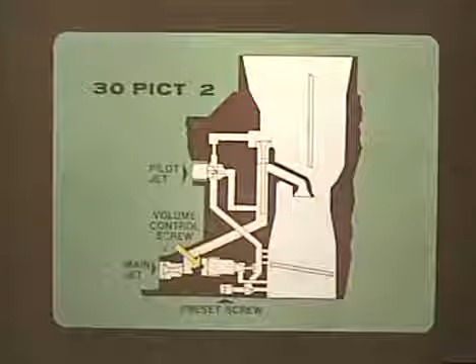The idle speed is controlled by an adjusting screw which opens or closes the throttle as before, but notice the changes in the idle circuit.

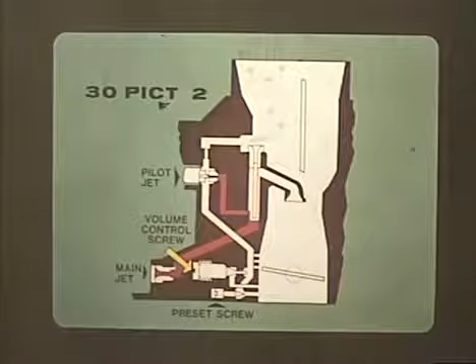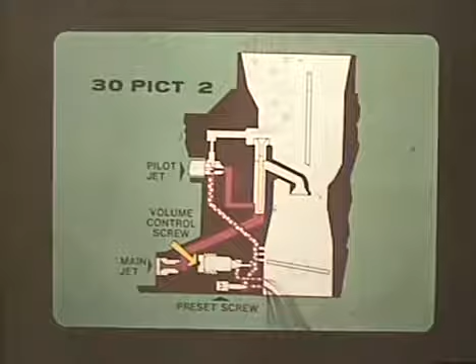Air entering the idle circuit passes through a calibrated hole to the pilot jet where it mixes with fuel. The fuel-air mixture reaches the volume control screw as before, but a portion of the mixture is controlled by a factory preset screw, so adjusting the volume control screw makes only a small difference in engine RPM.

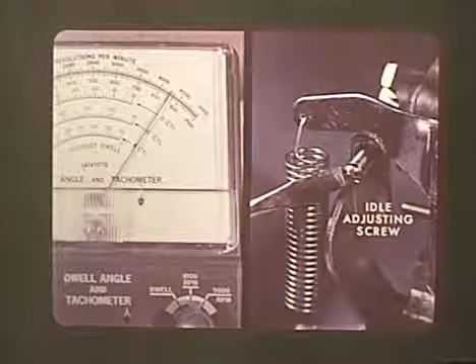To adjust a 30 PICT-2 carburetor correctly, be sure that all other engine adjustments are correct and that the engine is warm. With the tachometer attached, adjust the idle to the correct RPM with the idle adjusting screw.

The volume control screw is slightly different, and because of the refined system makes only slight changes in engine speed. So watch the tachometer and turn the volume control screw in carefully until the speed drops slightly. Then unscrew it until the fastest RPM is reached.

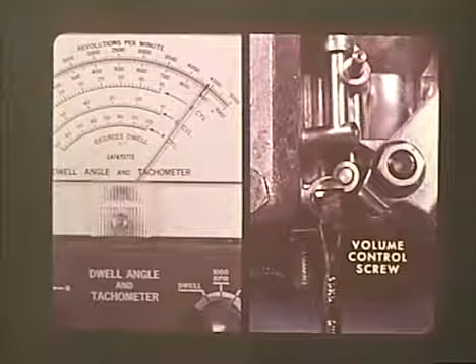The idle speed may have to be readjusted. With the 30 PICT-2, as with other carburetors, be careful of the volume control screw. It is delicate and easily damaged if forced against its seat.

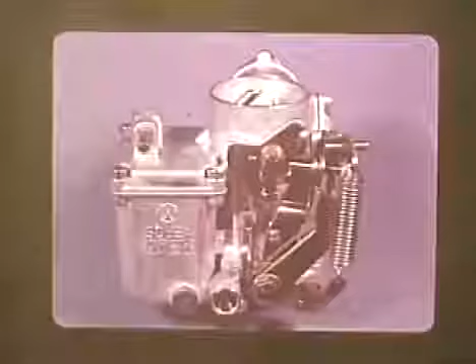The 30 PICT-3 carburetor, which was introduced on the 1970 models, has some significant changes. Remember how we controlled idle speed by opening the throttle valve in the other carburetors? Well, in the 30 PICT-3, the throttle is always closed during idle.

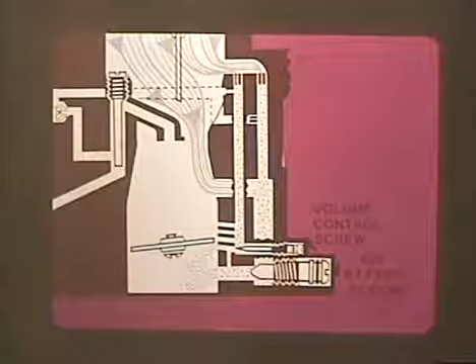Idle air now bypasses the throttle valve and is controlled by the air bypass screw. Unscrewing it opens this passage, allowing more air to the engine. The fuel circuit has also been modified and is now connected to a volume-controlled drilling and an air bypass where it mixes with the incoming air.

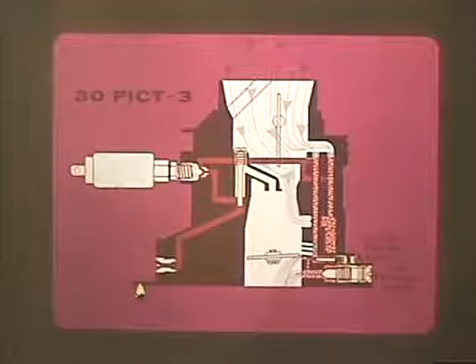Since the volume control screw is preset at the factory, the air bypass screw controls idle speed and the air-fuel mixture is monitored automatically. Idle speed adjustment on the 30 PICT-3 is very simple.

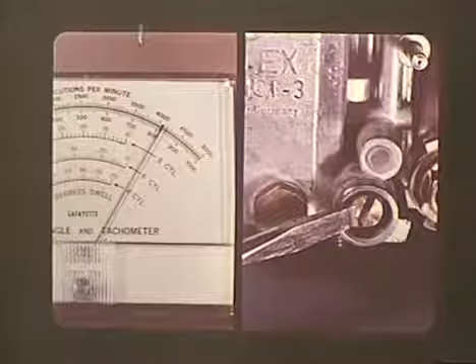With the engine at normal operating temperature and a tachometer attached, adjust the idle speed by turning the air bypass screw. Turning it in reduces the speed. Turning it out increases the idle speed. And the fuel mixture is automatically regulated. This is the only adjustment you make on the 30 PICT-3.

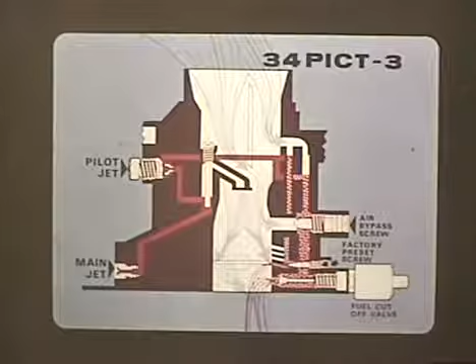That brings us up to the 34 PICT-3, the carburetor found on 1971 models. Its functions are the same as those of the 1970 carburetor. The important difference, aside from its larger size, is the relocated air bypass screw and the fuel cutoff valve.

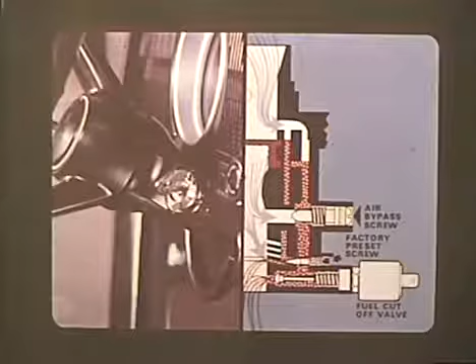When the ignition is switched on, the fuel cutoff valve is held open and the idle fuel-air mixture can reach the engine. When the ignition is switched off, the valve closes and no fuel can reach the engine.

During idle, fuel from the main jet is drawn through the pilot jet to numbers 1 and 2, where it mixes with air from calibrated drillings.

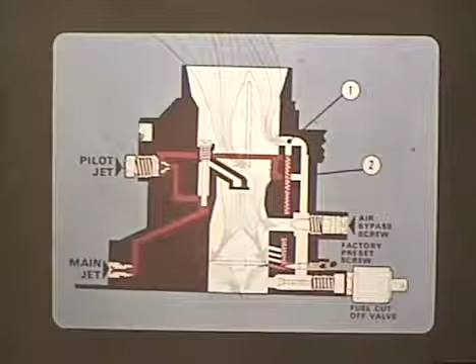In drilling number 1, the fuel-air mixture flows past the factory preset volume control screw and onto the engine. In drilling number 2, the rest of the fuel-air mixture, which is controlled by the air bypass screw, passes through the open fuel cutoff valve and onto the engine.

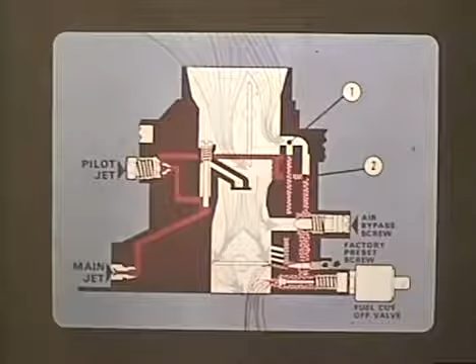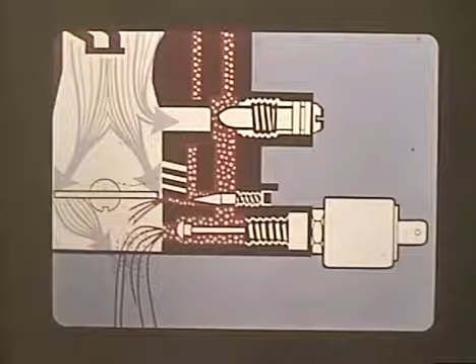Unscrewing the air bypass screw opens the passage and allows more air and also more fuel to reach the engine, which of course raises the RPM.

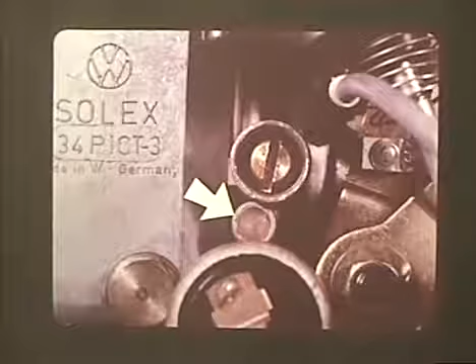The preset volume control screw on the 34 PICT-3, covered with a plastic plug, should not be touched during a normal idle adjustment. To adjust the idle speed, simply connect a tachometer to the engine, first making sure the ignition timing is right and that the engine is at operating temperature.

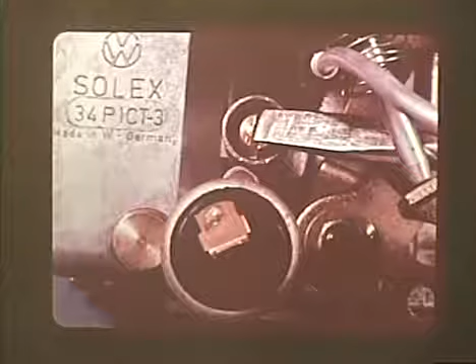Then turn the large air bypass screw until the engine is at the correct RPM. This automatically changes the fuel-air mixture to compensate for the changed RPM.

All Volkswagen carburetors, from the 28 PICTs to the latest 34 PICT-3, work on the same principles. Correct idle adjustment on all of them depends on a precise balance of fuel and air at the proper RPM.

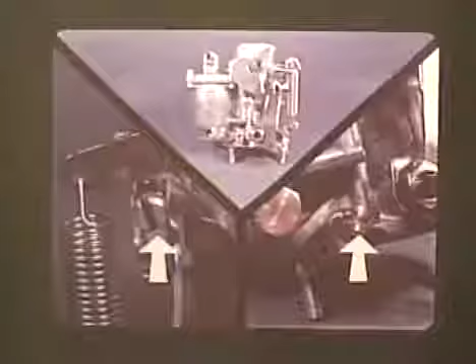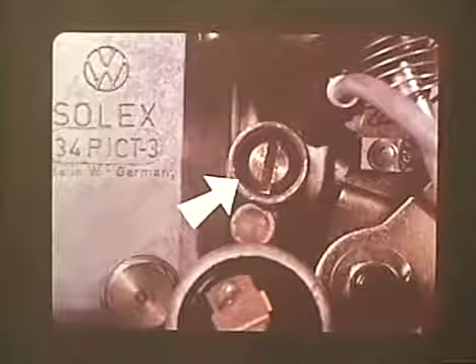Careful adjustment of the volume control screw and idle speed screw are essential on the older carburetors. And on the newer 30 and 34 PICT-3, the air bypass screw adjustment is vital to controlling the amount of unburned fuel that goes into the exhaust at idle speeds.

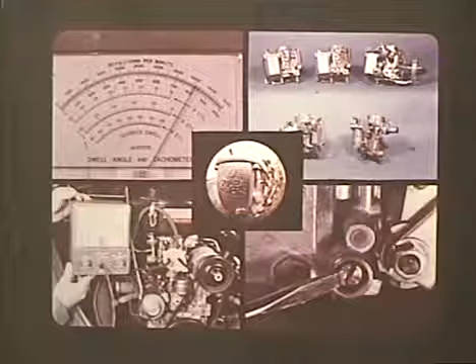The important thing is what you know about every Volkswagen that rolls in for checkup or repair. And you have to know the system. The Volkswagen carburetor system. Because the idle speed adjustment you make is the key to the efficiency of the system you control.